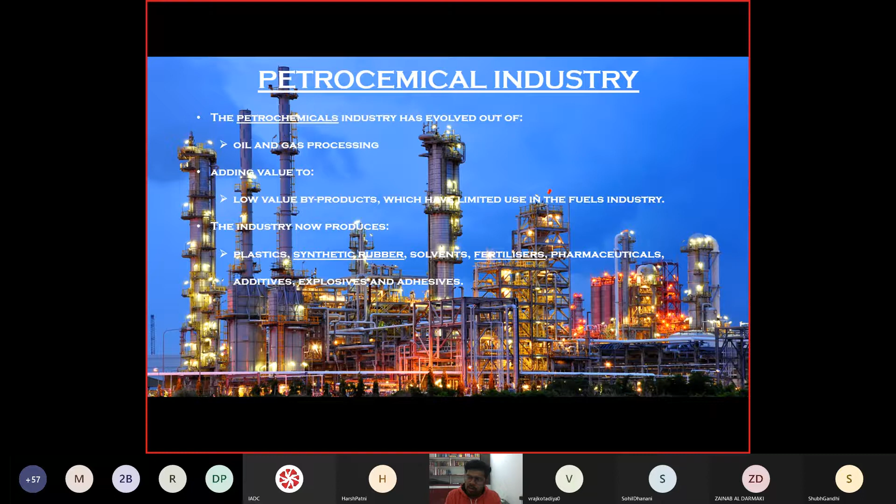It is not like all these products are made from propylene directly, because first propylene needs to be converted into other derivatives also. So from those derivatives, these products will come. But the mother of all things, the mother of this petrochemical industry, will be your propylene.

How many of you have seen the Chernobyl web series on Hotstar? Quickly answer - how many of you have seen the Chernobyl web series on Hotstar, or downloaded it from Telegram or something? How many of you have seen the Chernobyl web series? None.

Okay, one answer is there. So if you have not seen it, I request you to see that web series.

Being a chemical engineer or petrochemical engineer, you guys must watch that web series. You will realize what the actual chemical industry is like, how hazards take place, and what their impact is. All these aspects are covered in that web series.

It's about lives and the future generation, because in Chernobyl the atomic radiation was leaked. Due to that, even today the coming generation is affected in some manner, in their body parts or otherwise. Also, whoever was present at that time died due to cancer after 30-40 years.

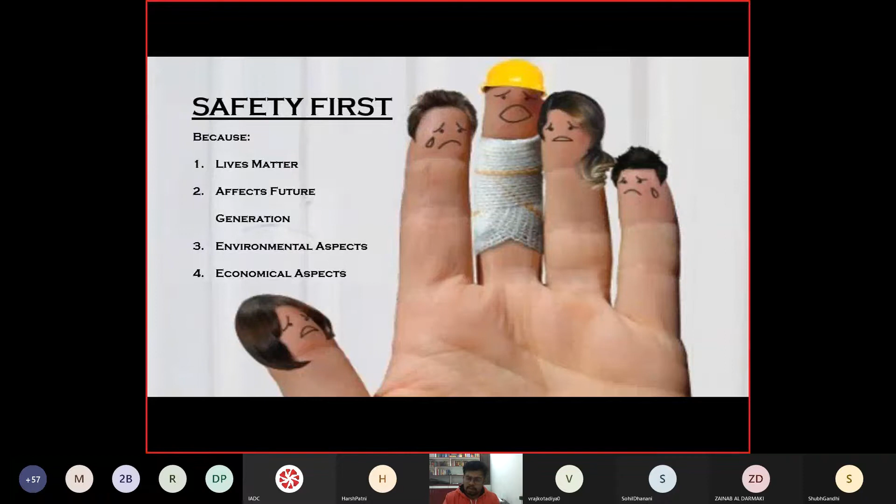So you will see these types of symbols whenever you go to the plant. Now everybody, please focus on what I am imagining in my mind, that all of you are stepping your foot into the refinery or petrochemical complex.

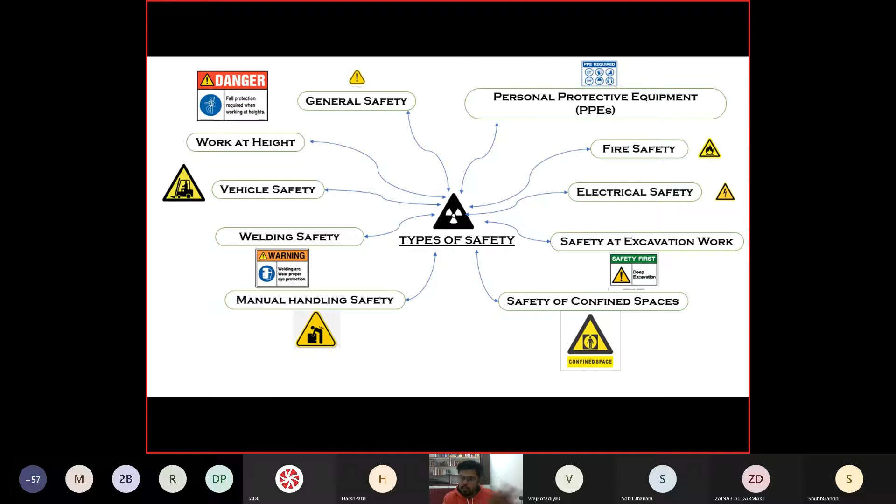Now in this webinar, we will see every topic one by one. In general safety, there are some aspects involved because it is not associated with any specific chemical plant.

If you are working in an FCCU plant, the hazards associated with it might be different than the hazards associated with your utility plant or power plant. But these general safety rules will remain the same in every plant.

Are you getting my point? Hazards associated with some particular plant might be different, but these general safety rules will always be the same for all of the plants of the entire complex. Correct? So this is the list. We will see this list in detail. I have just put that these many points are there.

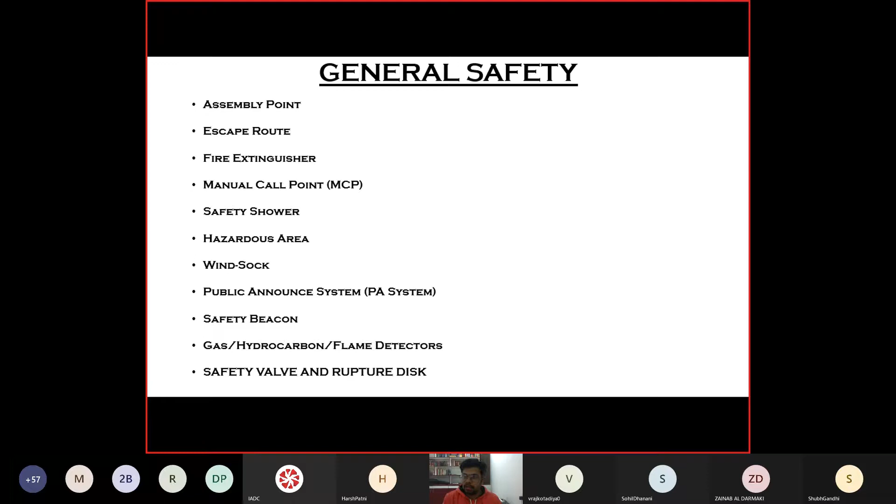Assembly point, escape route, fire extinguisher, manual call point, safety shower, hazardous area, windsock, public announcement system, safety beacon, gas hydrocarbon flame detector, safety valve, and rupture discs. Right. Now, assembly point. You might have seen this symbol even in day-to-day life, nearby some hospitals or near big buildings.

But if you are working in industry, consider that you are a fresher in the chemical petrochemical plant and it is your first day. On the very first day when you are going into the plant, your very first step should be to check where the assembly point is. The assembly point will be an open place where many people can stand together. That is your assembly point.

If anything happens in the plant, if you are not capable to deal with that incident, it is your duty to run out from the plant and to stand at this assembly point. Getting it? The importance of the assembly point is it is a risk-free area of your plant, and it is very open space.

So whenever something has happened, if you are not aware of what is going on, there is the sound of some siren, it is your first and foremost duty. Why am I telling this? Because you are not the liability of someone.

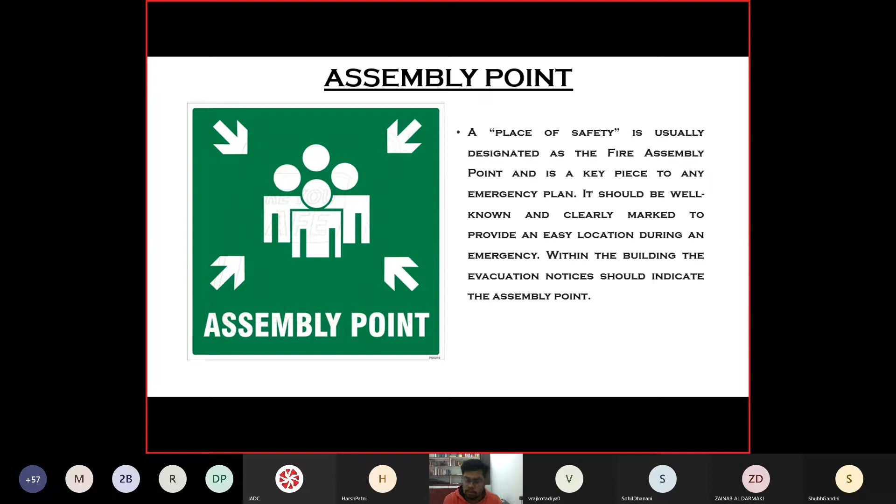Whenever something happens, even a gas leak or fire, you need to come out from this route, because this route is designed in such a way that you will not get any hurdle in your route.

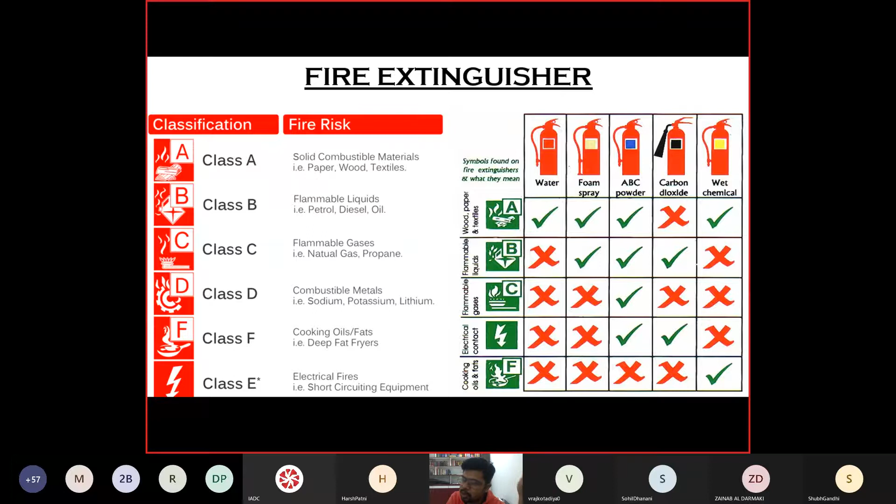Just a second, guys, just a second. Just give me 30-40 seconds, right? I am coming back. Okay, sorry guys.

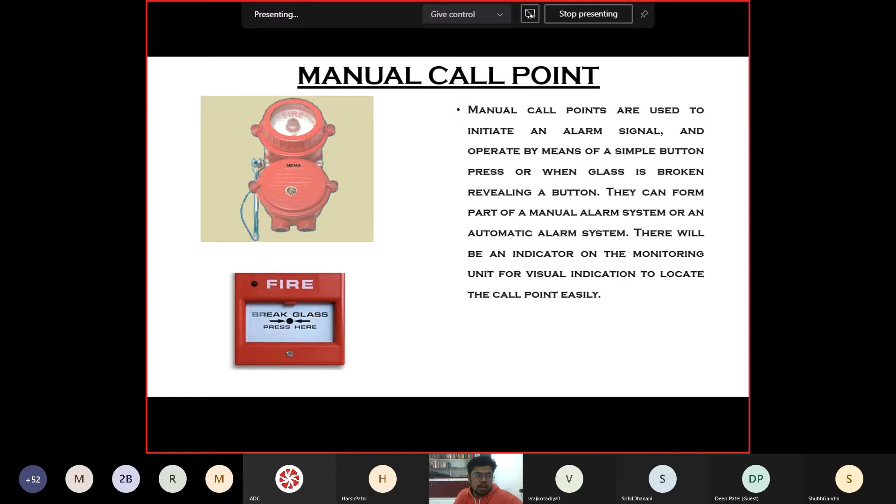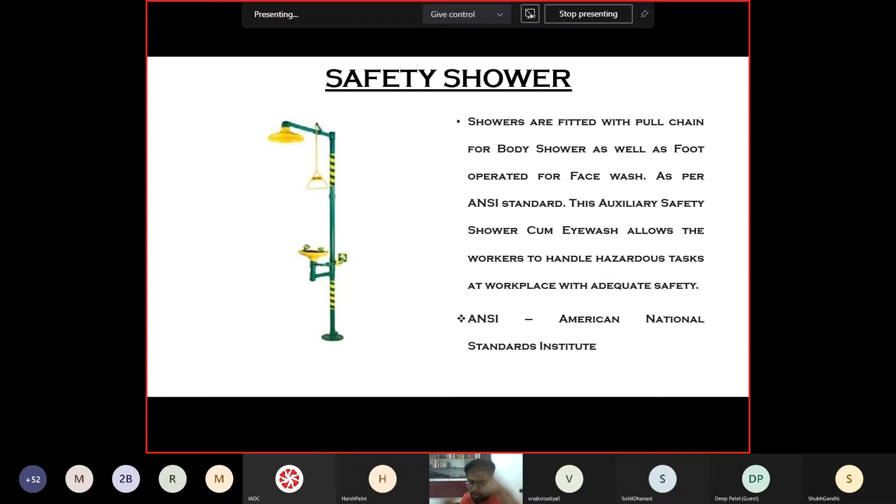So you will see some hazardous areas in your plant. They will be marked with color strips, whether it is an H2S prone area, hydrocarbon prone area or firefighting system area. Like for H2S prone area, normally they use blue and yellow strips, in a cross pattern. It will be painted on your floor that in this area there might be chances of H2S leak, right?

It is not that H2S is leaking, but the fluid or the chemicals going into the vessels in that area will contain H2S and there might be chances of H2S leaking in that area. That's why it is known as an H2S prone area. H2S may or may not leak; there are just chances. You will not see this painting at your assembly point, correct? Because the assembly point is the safest part of your plant.

So inside the plant, not on the whole plant, in some parts only, you will see painting of blue and yellow strips, and the meaning of that will be that this is an H2S prone area. If the painting is black and yellow, it is a hydrocarbon prone area. And if the painting is red and yellow, the area will be your firefighting system area. Firefighting system we will see during fire safety, right?

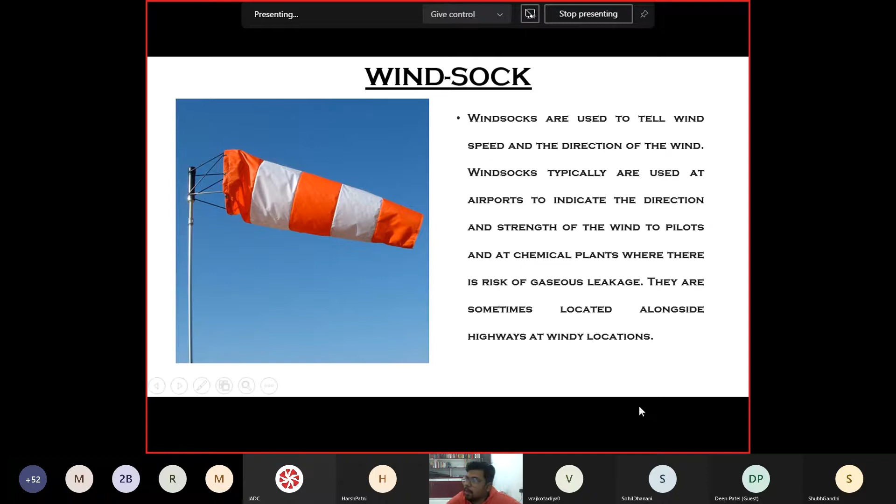Then is public announcement system. This public announcement system is more like a telephone, and also an announcement speaker. You need to check in your plant where this public announcement system is. The main benefit is about wind direction, because, let me just give you some glimpse.

Whenever there is an H2S leak, some flammable gas leak or some fire, you should never run in the opposite direction of that source. If the gas leak is behind, I should not run in the forward direction. I need to see the wind direction, and I will always run in the crosswind direction. If the wind direction is from behind to forward, and the gas leak is also from behind to forward, the direction in which I will run will be this. That is crosswind direction, right?

So whenever a leak or fire happens, you need to see the wind direction from the wind sock. Because your plant is surrounded with so many equipments, you won't be able to check the wind direction otherwise. The easiest way is your wind sock, from your plant or another plant, because they are at great height. So you can see the wind direction and run in the crosswind direction, always, not the opposite direction. That's the main benefit of the wind sock. Hope I am clear, and if not, we will take it in detail during our Q&A session.

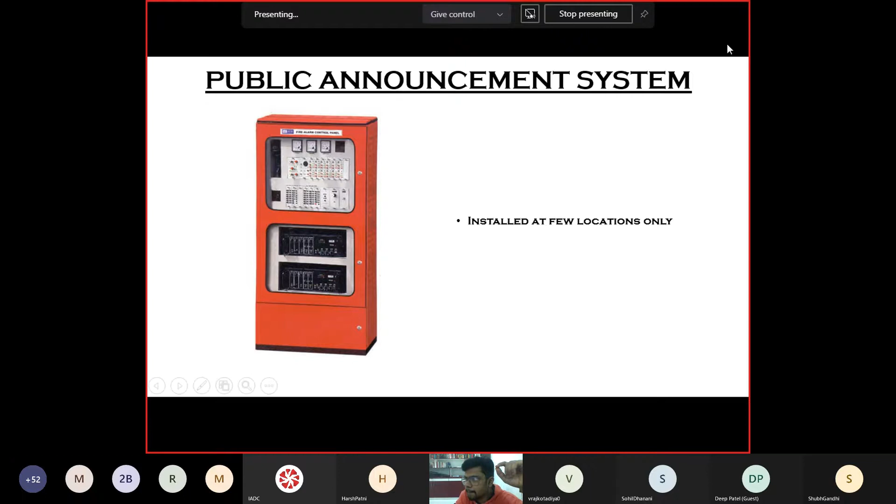Then it's your safety beacon. These are all linked with your MCP, and from control room also, and with detectors also. We will see the detector.

Different lights are there for the safety beacon. You need to spot your safety beacons in your plant as well whenever you are entering the plant. On day 1 only, you need to check where your safety beacons are, because they are indicating — if it is red light, it will be a sign of fire. Fire is inside your plant.

If it is yellow, flammable gas has leaked somewhere in your plant. If it is blue, it is toxic gas. Toxic gas means H2S, H2S is toxic gas. Flammable gas means your LPG, propylene, acetylene — those are your flammable gases. So if it is red, it will be fire. If it is yellow, it will be flammable gas. And if it is blue, it will be toxic gas.

So these are all linked with your detectors, as I told, we will see detectors in a few minutes. Whenever a detector detects some gas, according to the type — whether it is flammable or toxic — this beacon will start to blink, and there will also be a sound of siren.

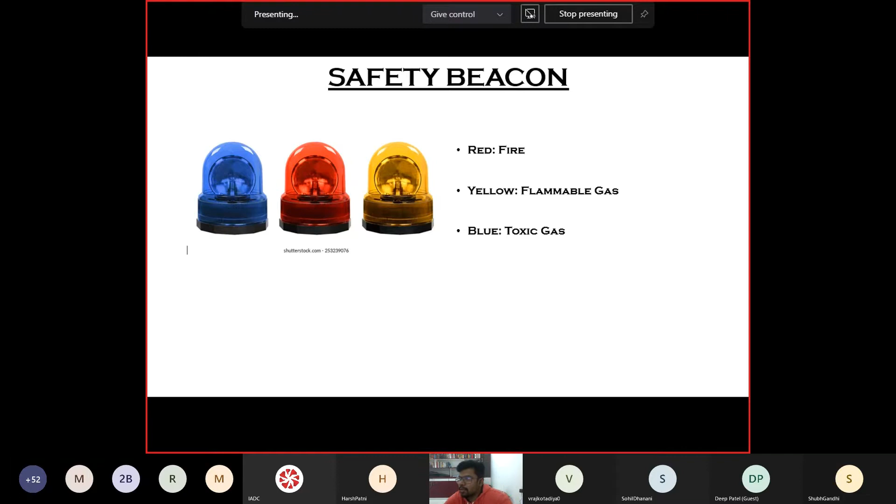Then what I was talking about, the detectors - gas, hydrocarbon and flame detectors. Usually your gas detectors check because H2S is more hazardous. Usually we install the detectors for H2S separately. Along with that, there will be hydrocarbon detectors and flame detectors. The last two are the flame detectors. Blue one is your hydrocarbon detector, yellow is your H2S detector.

And these three at the bottom are the detectors for personal use. The above 4 will be installed in your plant, in fixed position, right? The bottom 3 will be in your hand, or tucked to your body. These bottom 3 are for personal use. The above 4 will be installed in your plant.

Now let's suppose this H2S - there will be some limit set inside this detector. We will see what should be the limit of each hazardous or poisonous gas. I have put that slide also, so we will see what should be the limit. But let's suppose there is an over-limit of H2S in that particular area, and this toxic gas release - this detector has detected that the H2S has gone beyond the limit.

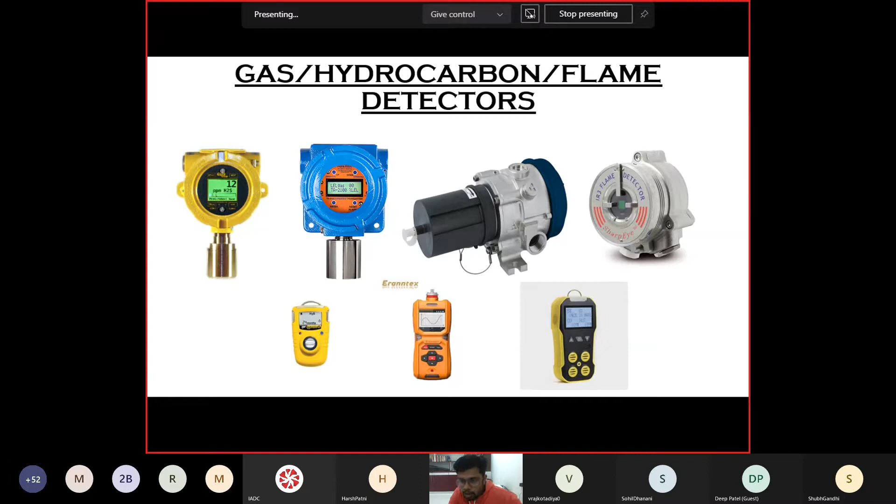For which kind of alignment and bend? I am not able to get your question. You just type it out, I am just moving on. You just type it out, okay.

So these are the short forms of your exposure limits for toxic gases or flammable gases. You will see short forms like PEL, TLV, REL, TWA, STEL, C, and IDLH. Most important are three: threshold limit value, short-term exposure limit, and IDLH. These three things are very much important. We will see how.

But this short form will be displayed in your plants as well. The PEL of H2S is this, TLV of H2S is this, STEL of H2S is this, IDLH of H2S is this.

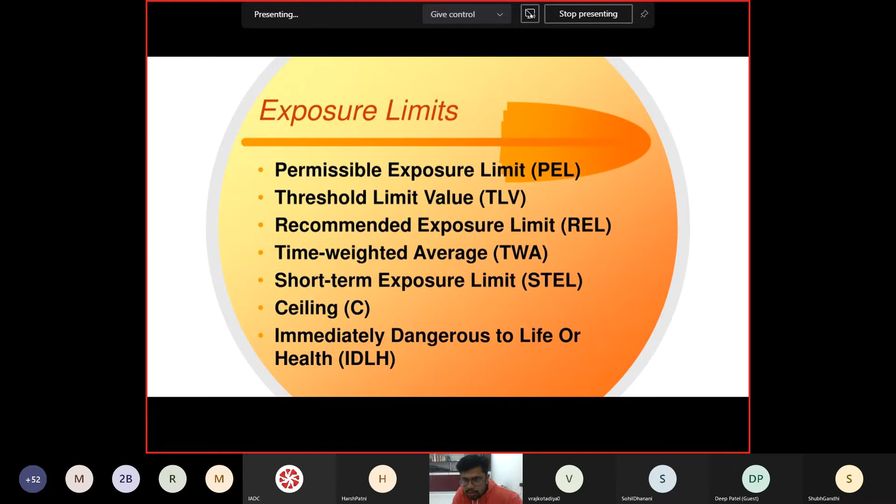Now this you need to keep in your mind always - deadly poisons. If you are watching on your mobile, you can keep the screenshot of this slide as well. And it is available on Google as well - I have taken it from Google only.

So explosive range - on the left box you are seeing explosive range, that is lower and upper limit, LEL and UEL. Now AIT, that is auto ignition temperature. LEL means lower explosive limit, UEL means upper explosive limit.

So lower explosive limit means if your H2S is around 4.5% and above, and the upper limit is around 45.5%. So your fire will take place in this range only. Below 4.5%, H2S is too low that it cannot cause fire, and above 45.5%, H2S is too much that it cannot cause fire. So your fire will always take place whenever H2S concentration is between 4.5% to 45.5%.

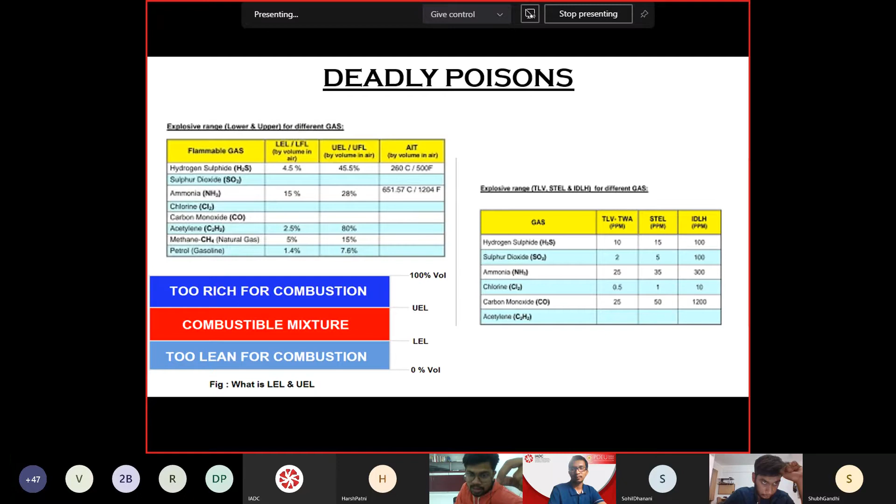Another is the safety valve and rupture discs, right?

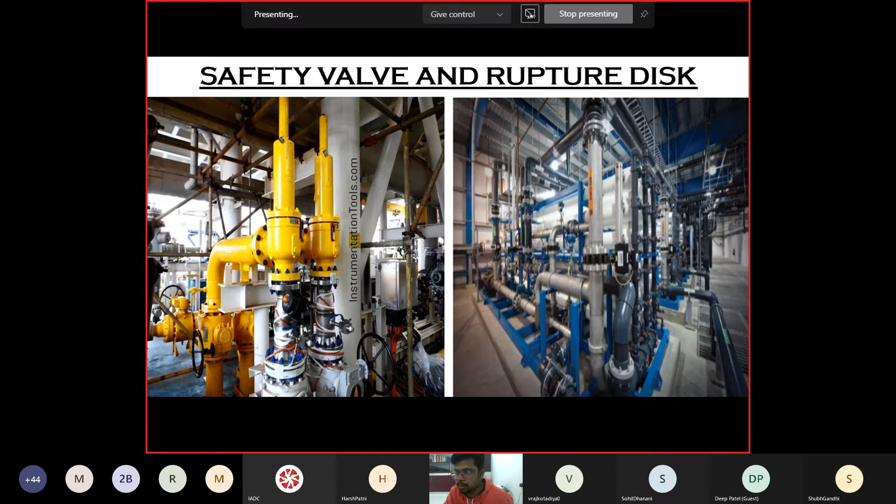Then that is PPEs. I will not go much into detail of PPE because you all know this, right? Whenever you are going into the plant, in Reliance and some refineries, they provide an overall, that is a full body cover. Even if you are an engineer or a contractor, you need to wear this full body cover, right?

A full body overall coat only. But in some refineries, like IOCL, Nayara or Essar, there is a uniform: full sleeve t-shirt or shirt and full pant. But the idea is your entire body should be covered. Whether it is t-shirt and pant or shirt and pant, your body should be covered, right? And the cloth of that uniform should be spark proof.

You might have seen that if I remove this jacket, there are chances of generation of static electricity. When I remove this jacket, a spark will generate due to static electricity. That should not happen in your plant, right? So your cloth should be spark proof and also shock proof. If it touches some electricity, say an electric wire, the current won't pass through your clothes.

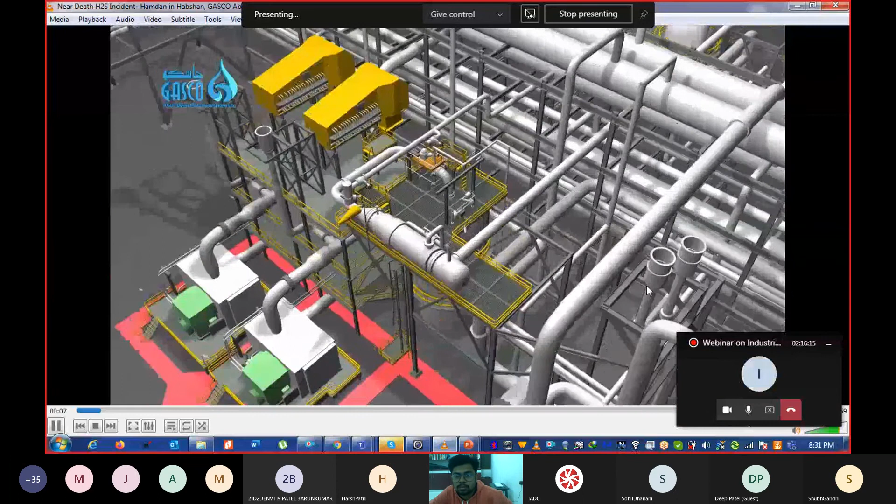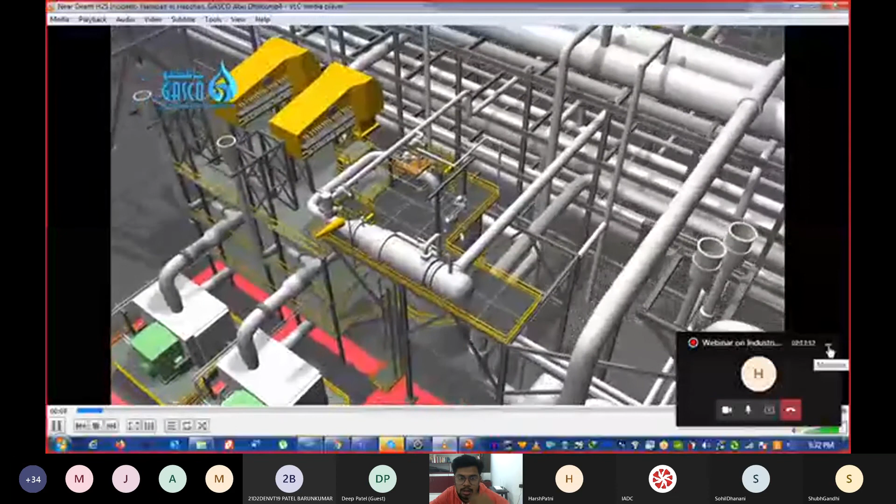Can you see the video? Sir, actually the video is visible, but the audio is not coming. So do one thing, sir. Stop sharing, then share again. There you will find an option, share with audio. Give permission to that option, then the audio will also come. Okay, just a second. Am I audible, sir? Yeah, audible. Now sound is coming, right? Yes, sir, it is coming.

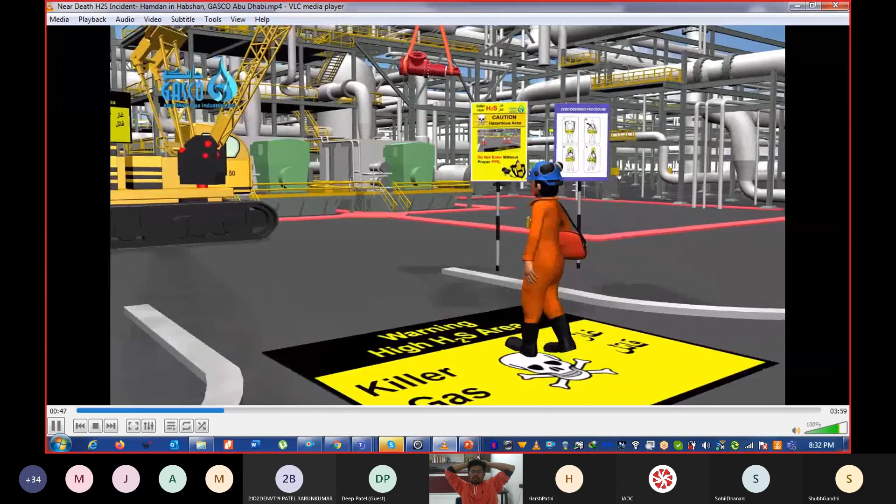This is the SCBA which I was talking about, self-contained breathing apparatus, right? Or a cartridge mask. This is the portable detector. That is a windsock, you can see.

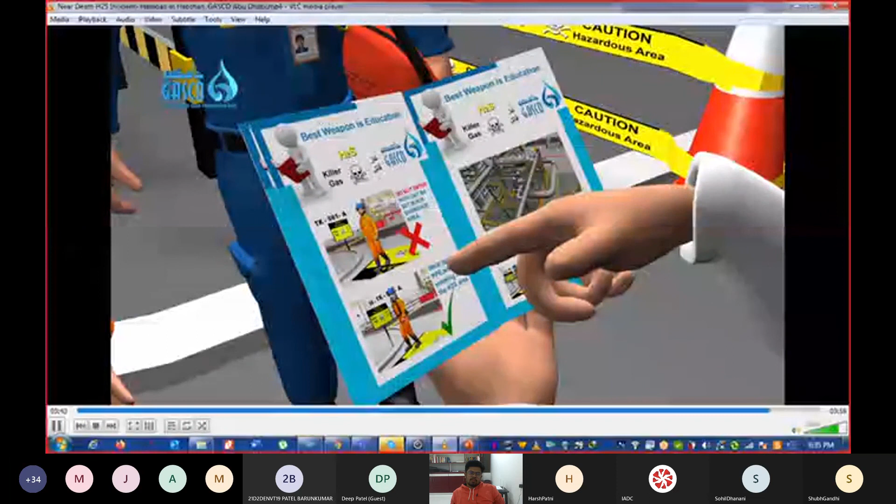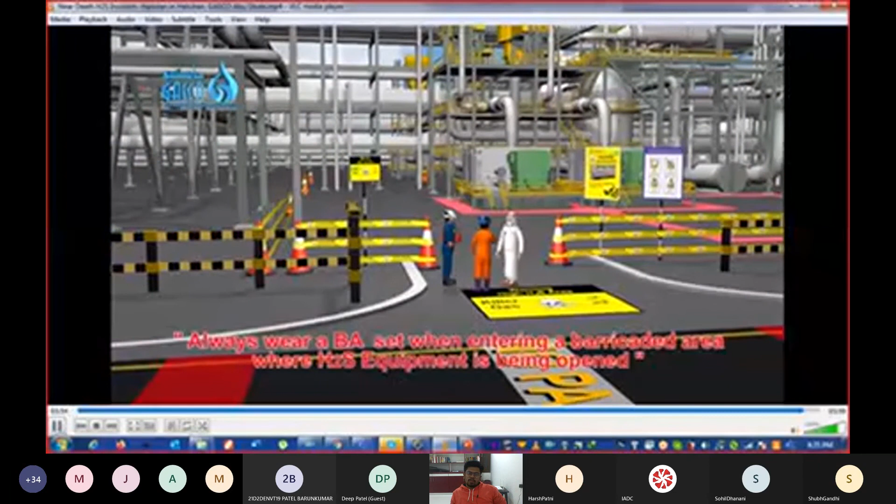So that was it. If there are some doubts regarding this video, we can solve them later. And if you want to watch it again, it is also available on YouTube.